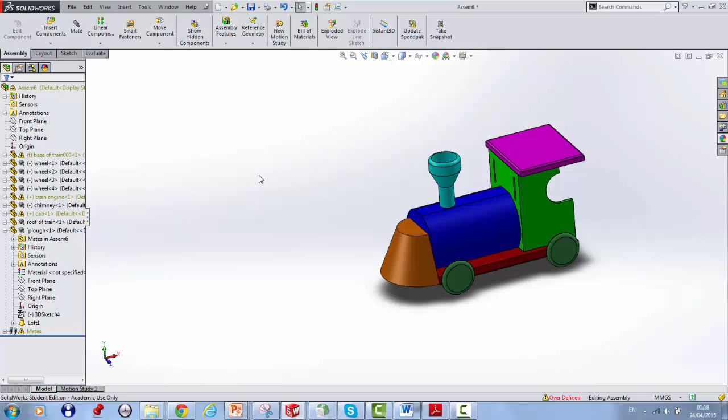This is the final step in the creation of our train. In this video we will be assembling the piece. So to begin we click File, New, and finally Assembly.

To begin we bring in the base of the train and click OK. Now we need to insert more components, so we begin by inserting the wheels.

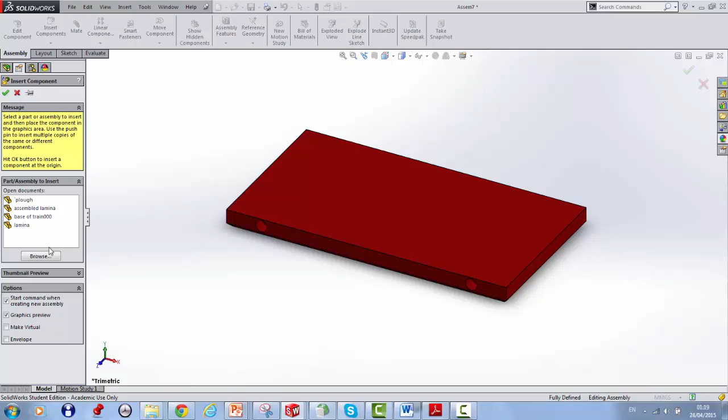We multiply these by holding the control button and then left clicking the wheels and dragging.

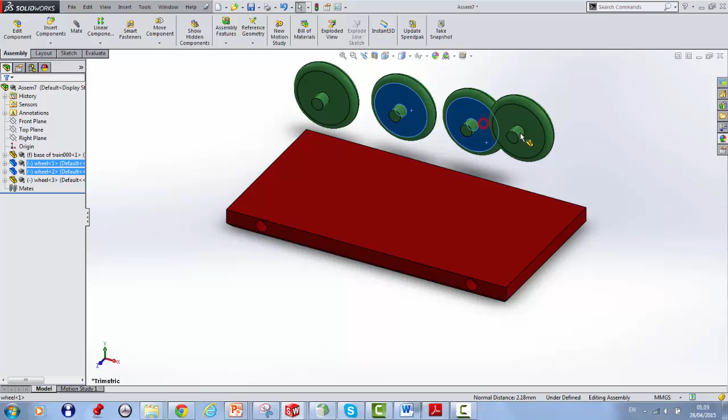Next we need to mate these components to the base. To do this we click the mate button.

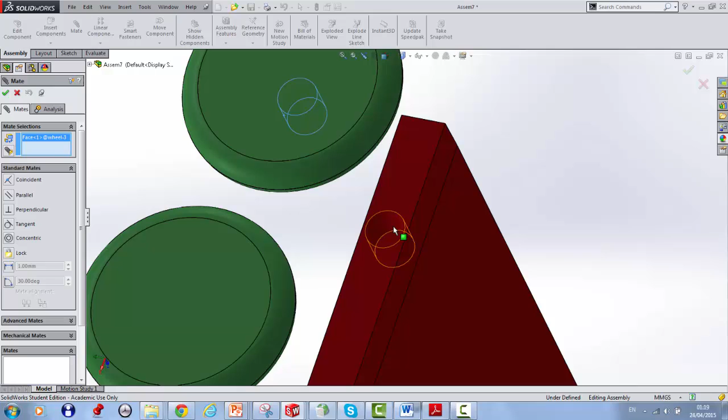We need to get this spigot to go into the hole here so the train will be able to move. So clicking this spigot, we then click the hole here provided.

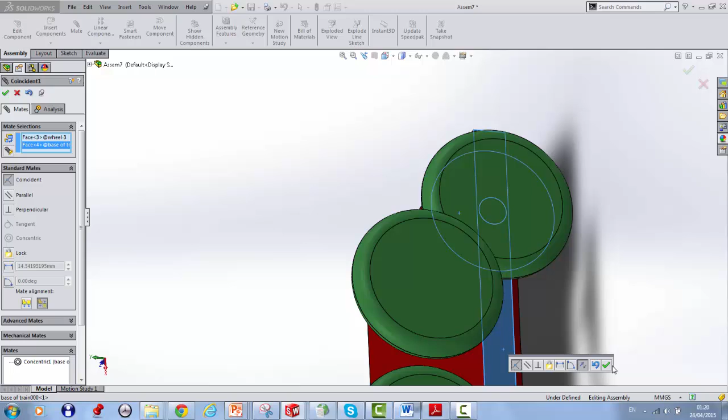Next we need to make sure it's in line with the hole, so now we need to make sure it's up against the edge of the base. So we mate the edge of the wheel with the edge of the base, and we click OK. We repeat this process with the next one.

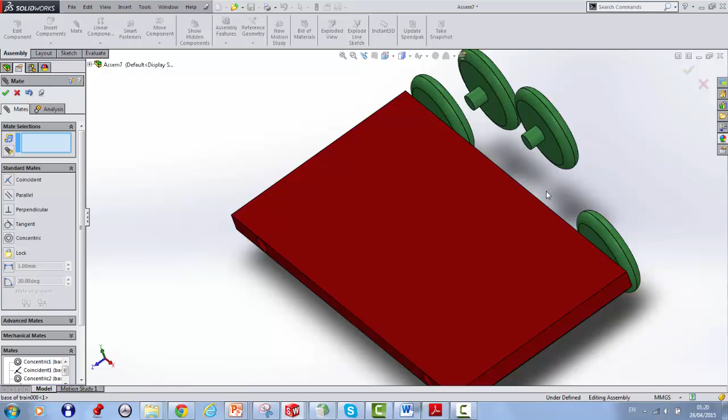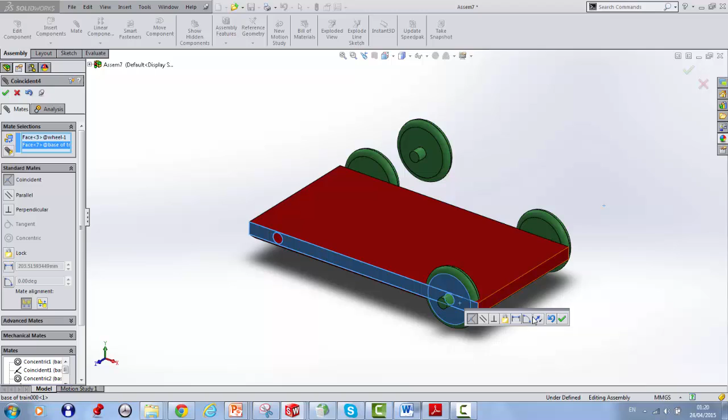You will notice that these two wheels are facing the wrong direction to fit into these holes. So we will begin the same way. We'll mate this spigot to this hole, and then we will mate this face to this face, and then we use a button called Flip Mate Alignment, which corrects how it is done.

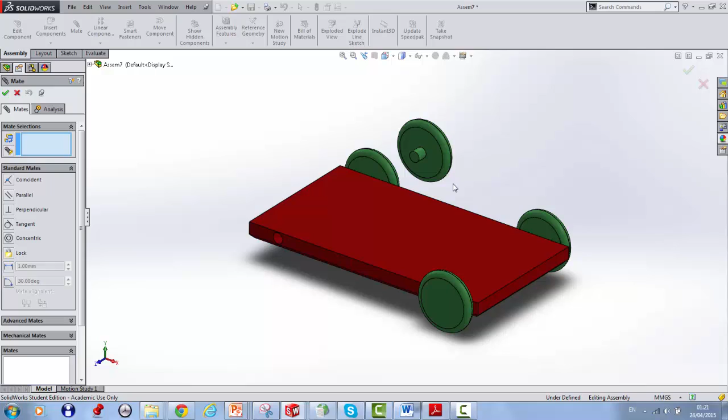We will do the same now with the next wheel.

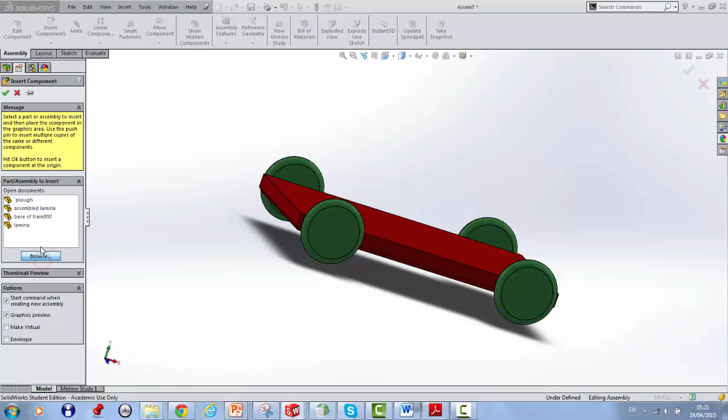The next component that we will be placing in this drawing is the train's engine. To begin, we know that the train's engine will sit on the base, so we will mate the base of the engine to the top of the train's base.

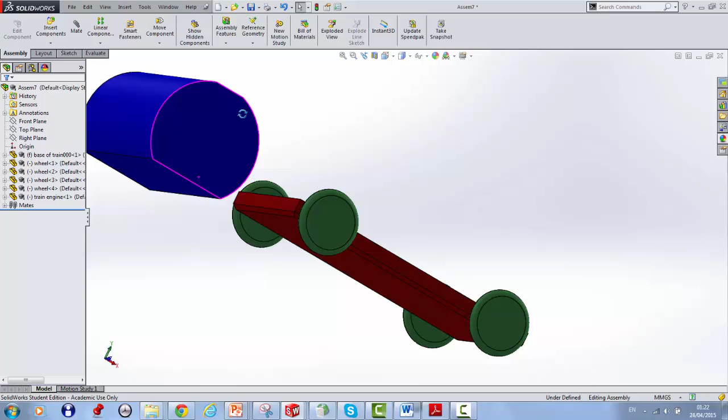We know that the bottom of the train's engine will rest on the top of the base. With this in mind, we will mate the bottom of the train with the top of the base.

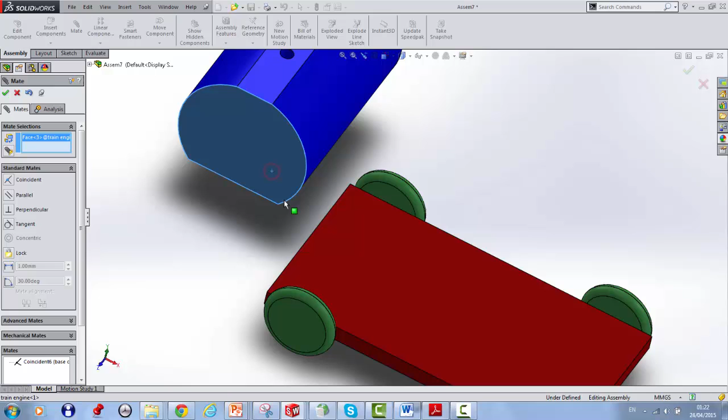We also know that the front of the train corresponds with the front of the base. So clicking the front of the train's engine, and then we click the front of the base. You will once again notice that it's faced the wrong direction, so just flip mate alignment.

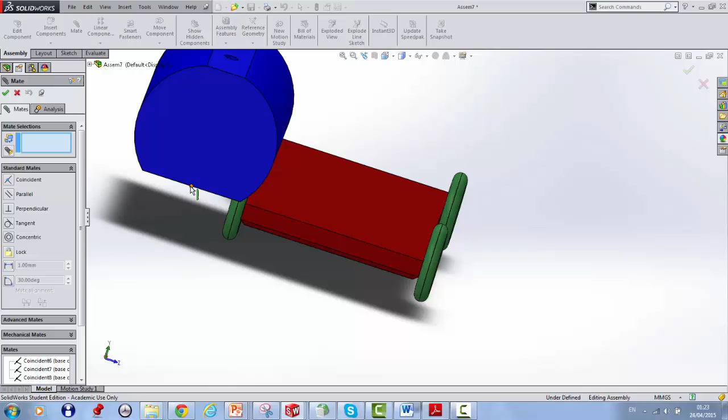Finally, we want to center this and lock it in place. To do this, we will click the center at the base of the train's engine and the center of the top of the base. They are now coincidental, and now the train's engine is locked in place.

Our next step is to insert the cab of the train. Click Insert Components, browse, and find your cab.

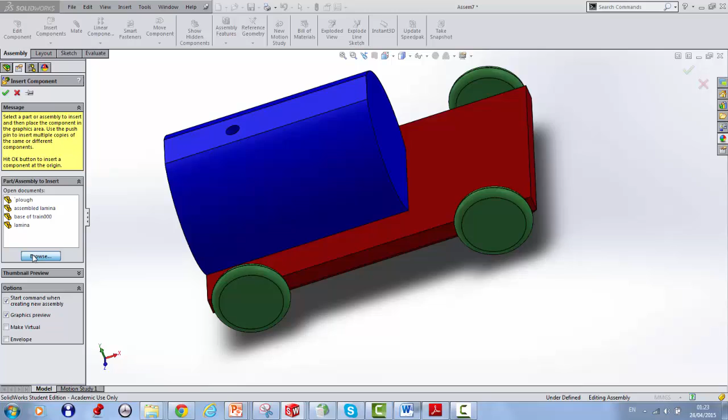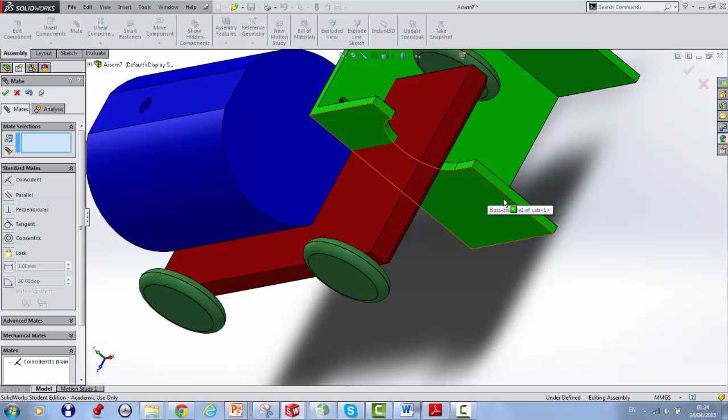We know that the front of the train corresponds with the front of the base, so we will mate the front of the train with the front of the base. We also know that the train's cab will sit on the base of the train, so we will mate these two faces.

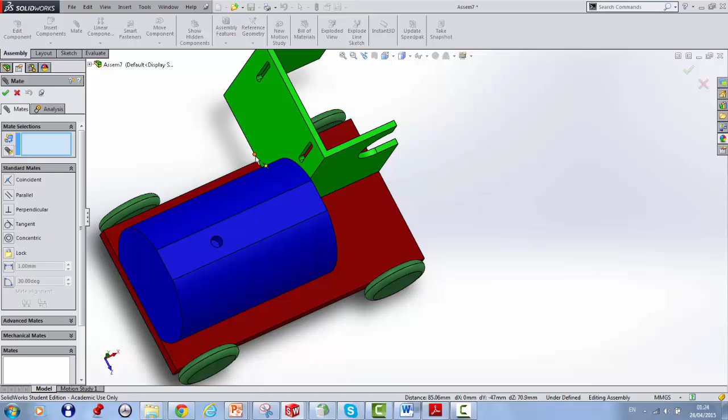Finally, we will align the axis of this point here and this point here, mating the center point on the front of the cab the center point at the back of the engine.

Next, we must make the train weathertight by placing the roof on it. So, exit out of Mate, we'll insert component, browse, and we'll put in the roof of the cab, the train's roof.

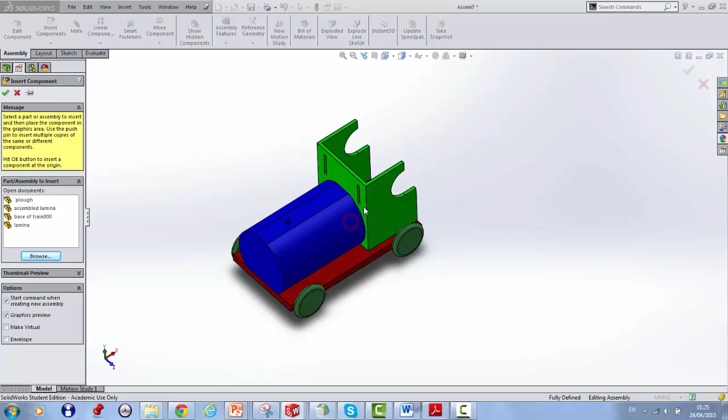To begin, we will mate the front of the cab with the front of the roof. And we'll flip entities here, as you can see it's the wrong direction, and click OK.

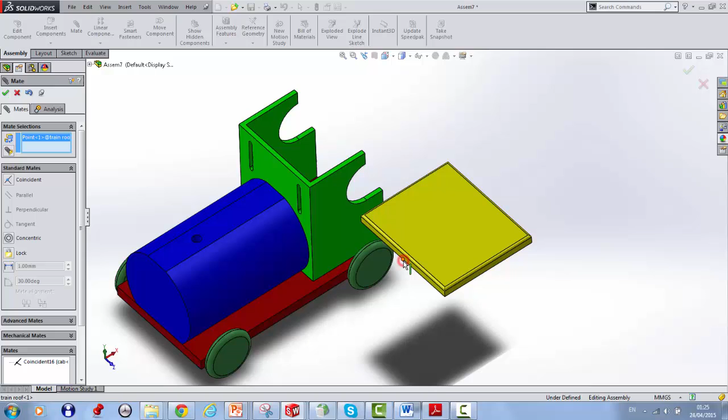Next, we will mate the center point of the roof and the center point of the train's cab. As you can see, it is still not stable. The top, or the base of the roof, and the top of the cab - hence, lock it in place.

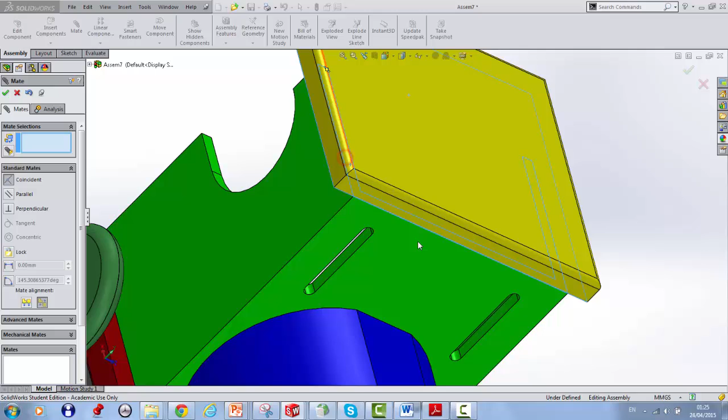The final two components to be placed in the train are the chimney and the plough. We will begin with the chimney. Insert component, and click chimney.

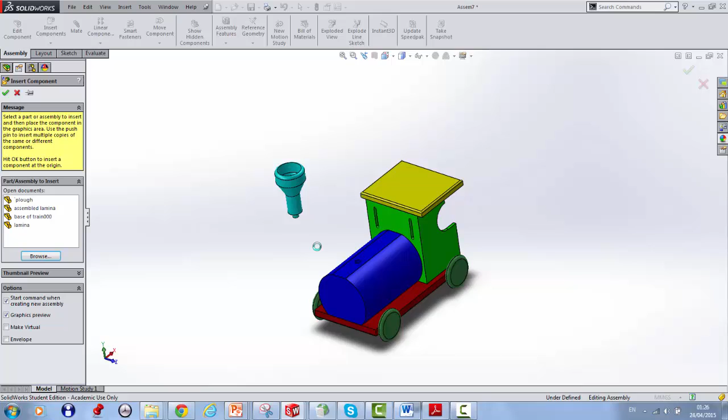Again, we are going to mate - you know this spigot goes into the hole, so we are going to mate this spigot with this hole. Finally, we know that this face rests on this face, hence fitting the chimney. Final component of this piece is the plough to go in the front.

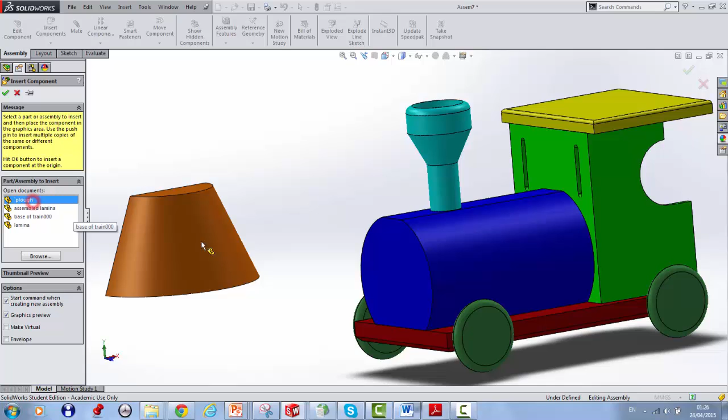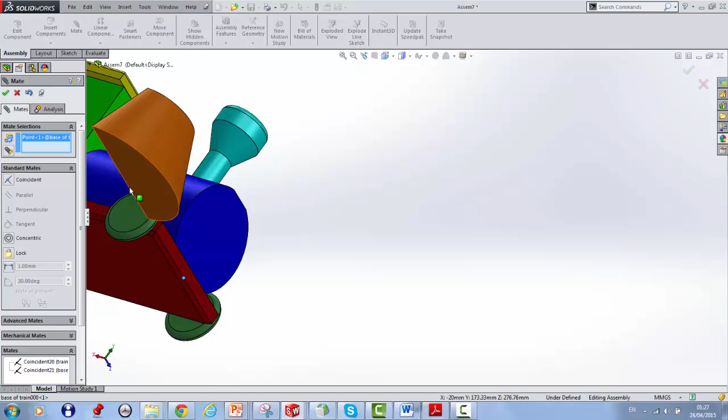We know which faces will line up, so we will once again mate those. We also know that this line in the plough corresponds with this line in the base. Finally, we will locate the two center points and lock the plough in position.

This is the completed project of the train. Thank you.